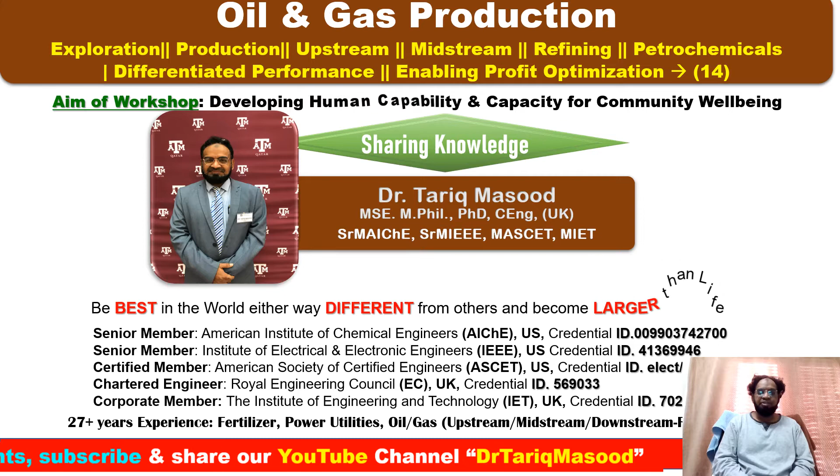Oil and gas production. These are the series of lectures which I'm still discussing. So my plan is to deliver 300 lectures probably, so over the next couple of years.

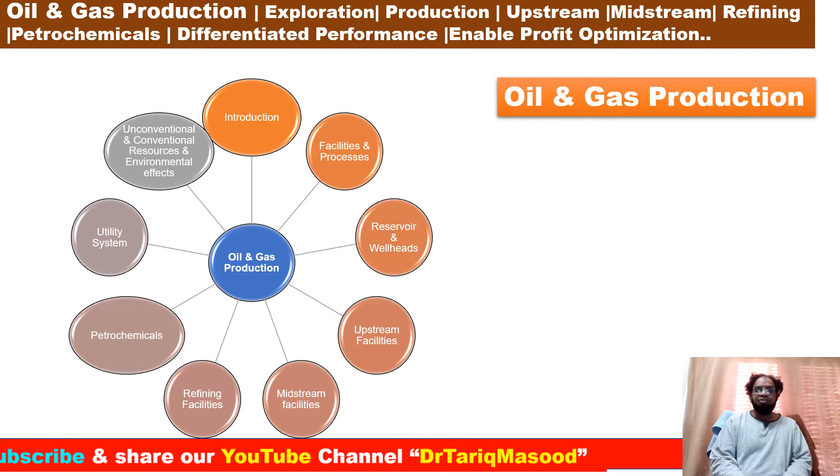Introductions, facilities and process, reservoir and wellhead, upstream facilities, midstream facilities, refining facilities, petrochemicals, utility, unconventional and conventional resources, and environment effects. Shaping the clean and sustainable global energy delivery. Plan to deliver more than 300 lectures next couple of years, probably.

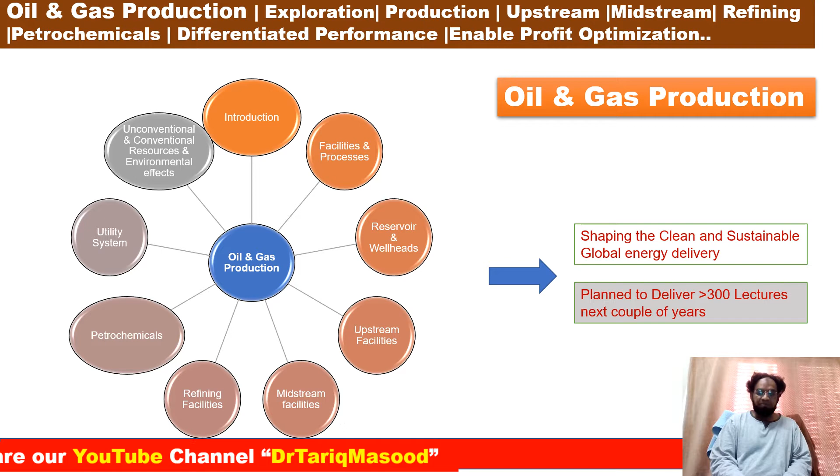Oil and gas production, upstream oil and gas process. So lecture number 15. From my next slide, I'm going to give key takeaway points from lecture number 15.

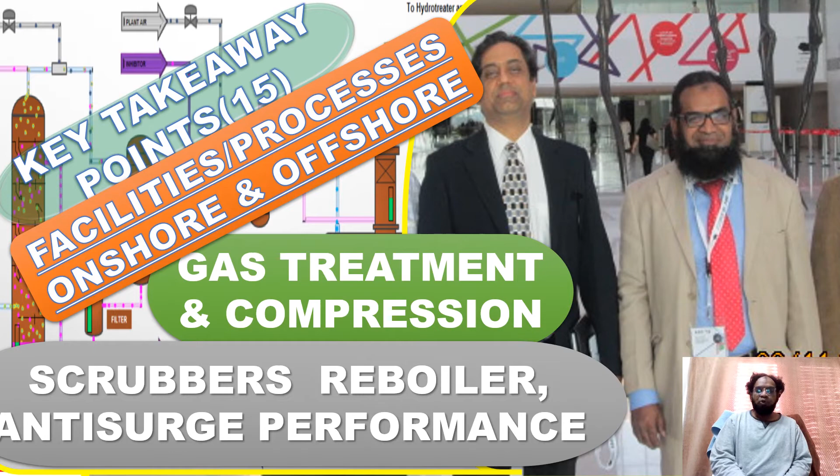Key takeaway points, lecture number 15: facilities process onshore offshore, gas treatment compressions, scrubbers, reboilers, and anti-surge performance.

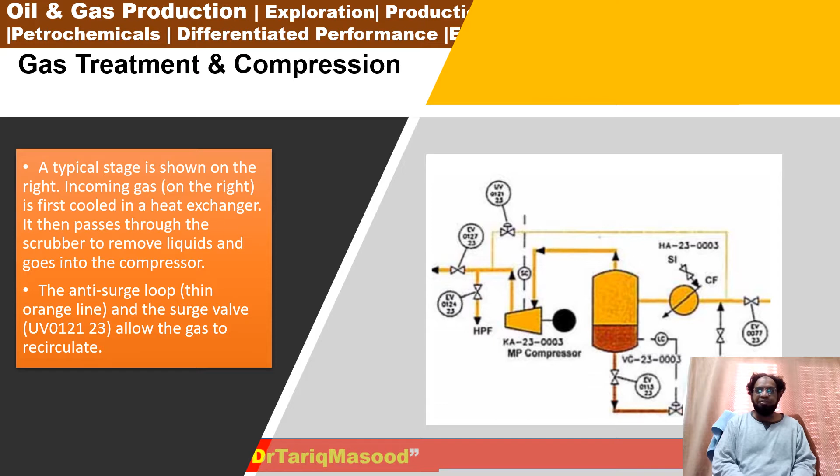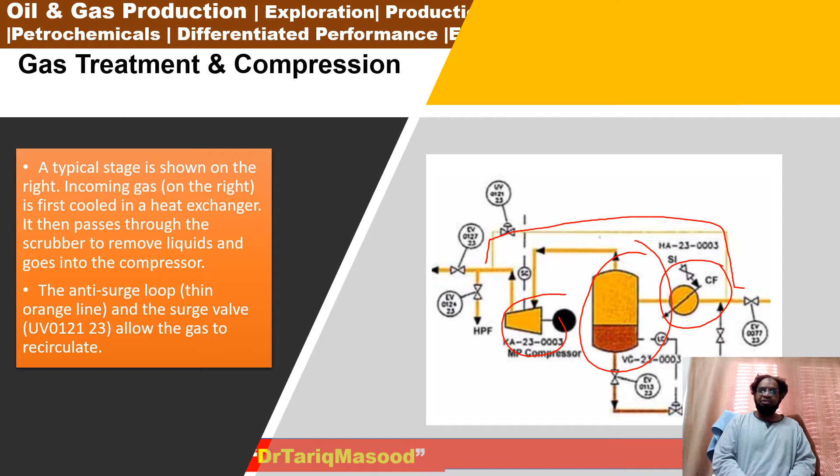Gas treatment and compressions. Before I explain, I'll show you the components here. This is my gas inlet cooler, this is the suction scrubber, and this is the compressor. And this line is the anti-surge line which recycles the flow. A typical stage is shown on the right hand side, if you can see here.

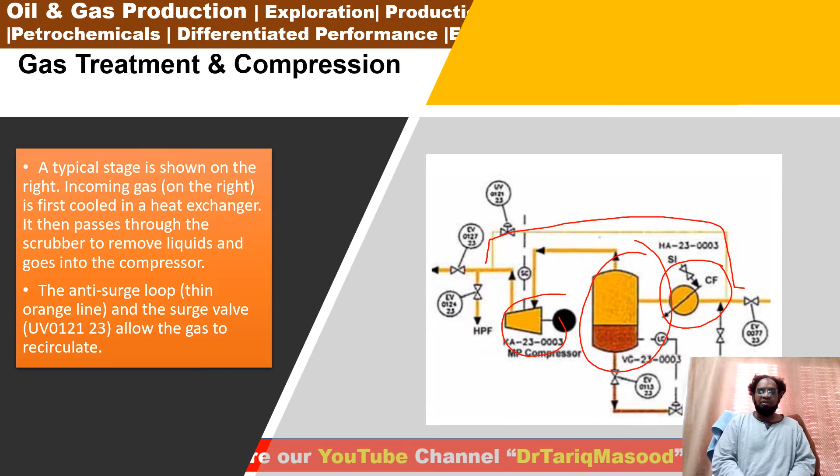So the incoming gas is first cooled in a heat exchanger. It then passes through the scrubbers to remove liquid, and the gas goes into the compressors. The anti-surge loop, the orange line you've seen here, demonstrates the anti-surge valves UV0121 23, which allow the gas to recirculate. The further components I'm going to explain from my next slide.

Heat exchangers, first we are going to discuss. For the compressor to operate efficiently, the gas temperature should be low. If you remember in my earlier slide, we discussed the feed coming from the reservoir at a temperature of around 80 to 100 degrees Celsius, then you need to have the cooler to cool it down for the compression purposes. Otherwise, your compressor will not perform as proposed. The lower the temperature, the less energy will be used to compress the gas for the given final pressures and temperatures.

However, both gas from the separator and compressed gas are at relatively high temperatures. When gas is compressed, it must remain in thermodynamic balance, which means that the gas pressure times the volume over the temperature must remain constant: PV equals nKT. This ends up as a temperature increase.

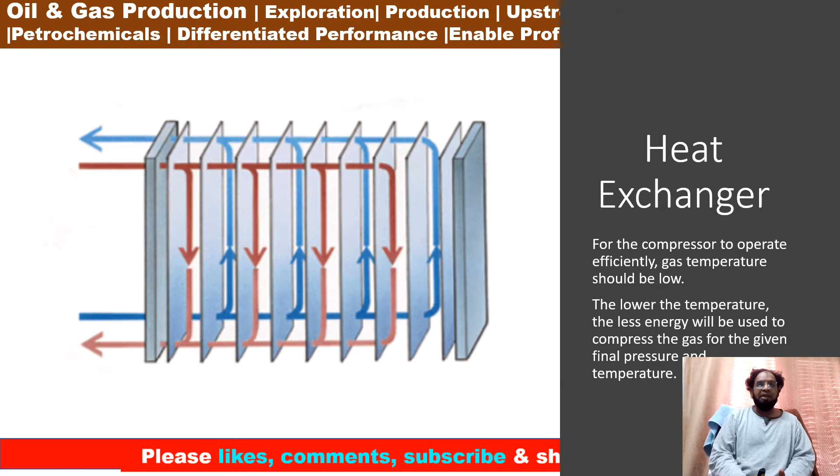Furthermore, as we discussed earlier, heat exchangers of various forms are used to cool the gas. Plate heat exchangers, as shown in my earlier slide, consist of a number of plates where the gas and cooling media pass between alternating plates in opposite directions. The tube and shell exchanger, if you can see here, has tubes placed inside the shell filled with cooling fluid. The cooling fluid is often pure water with a corrosion inhibitor.

When designing the process, it is important to plan the thermal energy balance. Heat should be conserved, for example, by using the cooling fluid from the gas train to reheat oil in the oil train. Excess heat is dispersed, for example, by seawater cooling. However, hot seawater is extremely corrosive, so material with high resistance to corrosion, such as titanium, must be used.

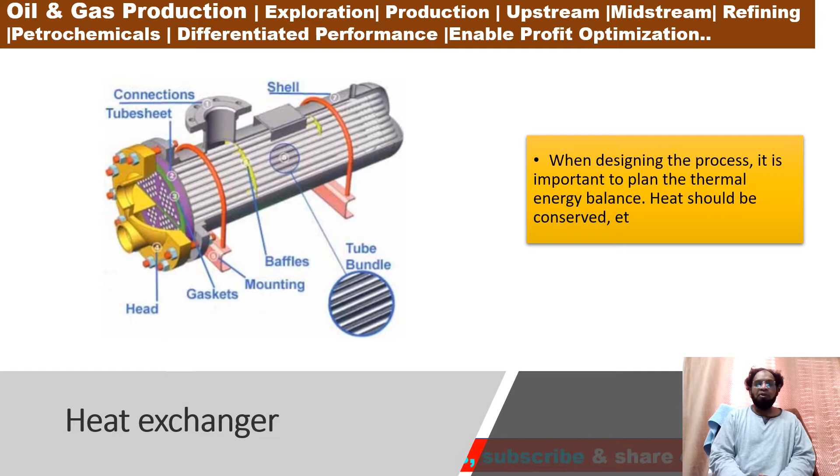From my next slide, we are going to discuss a scrubber. The separated gas may contain mist and other liquid droplets, drops of water, and hydrocarbons also form when the gas is cooled in the heat exchangers, and these must be removed before it reaches the compressor. If liquid droplets enter the compressor, they may erode the fast rotating blades. A scrubber is designed to remove small fractions of liquid from the gas.

There are various types of gas drying equipment available, but the most common we use is a scrubber based on dehydration by absorption in triethylene glycol. The scrubber consists of many levels of glycol layers.

A large number of gas traps force gas to bubble up through each glycol layer as it flows from the bottom to top of each section. Processed glycol is pumped in at the top from the holding tank. It flows from level to level and contacts the gas flow as it spills over the edge of the trap.

During this process, it absorbs liquid from the gas and comes out as rich glycol at the bottom. The holding tank also functions as a heat exchanger for liquid to and from the reboiler.

The glycol is recycled by removing the absorbed liquid. This is done in the reboiler, which is filled with rich glycol and heated to boil out the liquid at temperatures of 130 to 180 degrees Celsius for a number of hours.

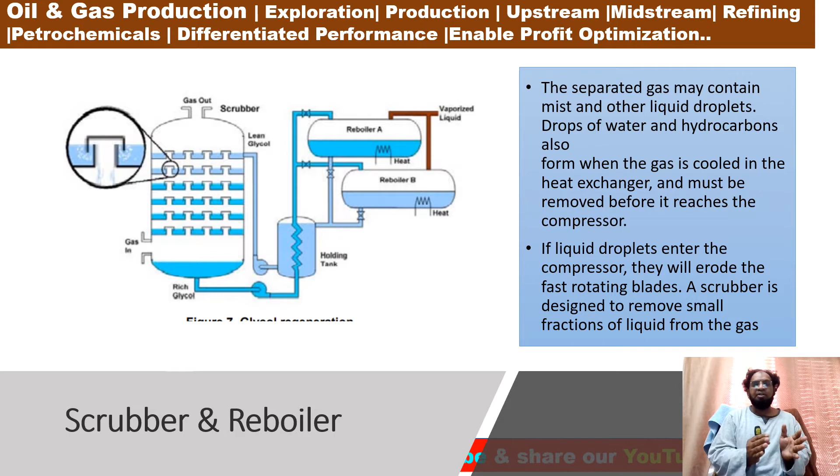This is how, depending on how the process is designed, it varies from place to place or at different facilities. Compressors are used in many parts of the oil and gas process, from upstream production to gas plants, pipeline, LNG, and petrochemical plants.

Several types of compressors are used for gas compression, each with different characteristics such as operating power, speed, pressure, and volume. Today we're going to discuss reciprocating compressors, axial blade compressors, screw compressors, and centrifugal compressors.

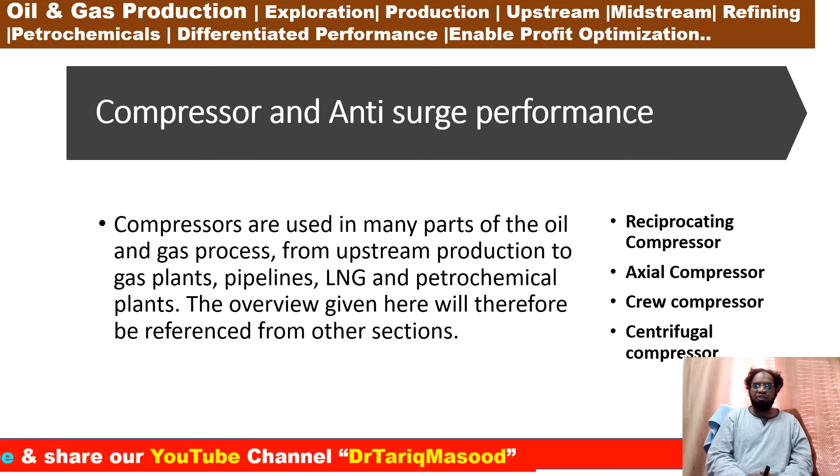Reciprocating compressors use a piston and cylinder design with 2 by 2 cylinders, are built up to about 30 megawatt power, around 500 to 1,800 rpm, lower for higher power, with a pressure up to 50 megapascals or 500 bar. Used for lower capacity gas compression and high reservoir pressure gas injection.

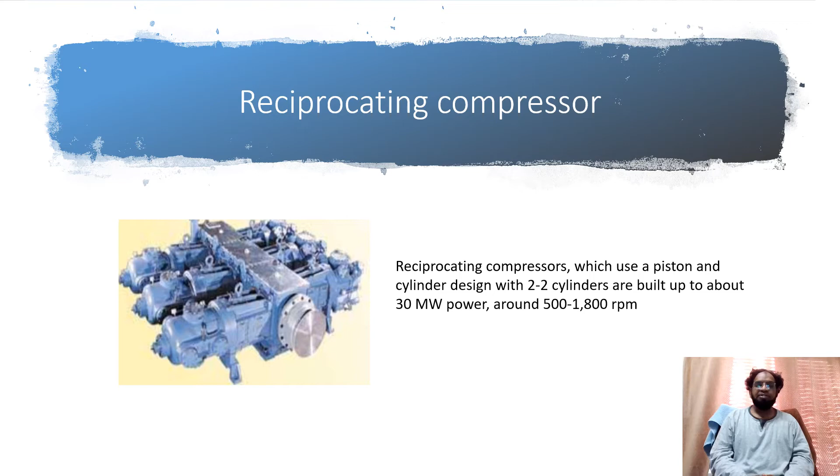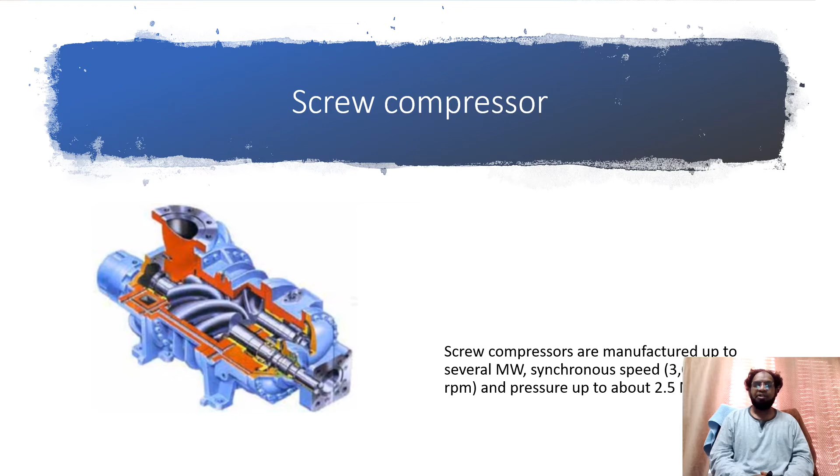From next we discuss the screw type compressor. Screw type compressors are manufactured up to several megawatts. Synchronous speed is 3000 to 3600 rpm and pressure up to about 2.5 megapascal or 25 bar G. Two counter-rotating screws with matching profiles provide positive displacement and a wide operating range. Typical use is natural gas gathering or vapor tank blowers, etc.

Axial blade compressors. Axial blade and fin type compressors with up to 15 wheels provide high volume at relatively low pressure differential, discharge pressure 3 to 5 times inlet pressure, speed up to 5,000 to 8,000 rpm, and inlet flows up to 200,000 cubic meters per hour. These are used as air compressors and cooling compressors in LNG plants and large oil and gas installations, etc.

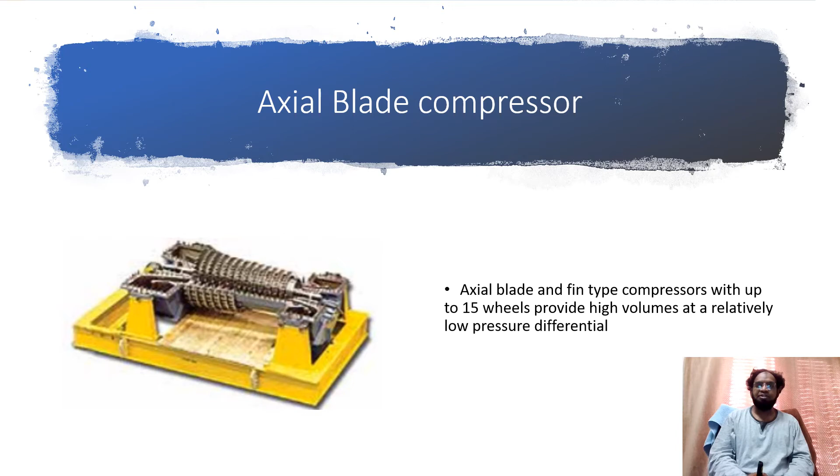From the next slide we discuss centrifugal compressors. Centrifugal compressors with 3 to 10 radial wheels, 6,000 to 20,000 rpm, highest for small size, up to 80 megawatt load, at discharge pressure of up to 50 bar and inlet volumes of up to 500,000 cubic meters per hour, pressure differential up to 10 bar.

Most compressors will not cover the full pressure range efficiently. The lowest pressure is atmospheric for gas to pipeline. Some 3 to 5 megapascal, 30 to 50 bar pressures are used, while reservoir injection of gas will typically require 20 megapascal or 200 bar and upwards.

Since there is no liquid in the tubing and the full reservoir pressure must be overcome, the compression is divided into several stages to improve maintenance and availability. Also, due to single unit power limitations, compression is often divided into several parallel trains. This is not the case in this example since gases are not exported and re-injection can be interrupted during maintenance periods.

Compressors are driven by gas turbines or electrical motors for lower power, and also reciprocating engines and steam turbines are sometimes used if thermal is not available. Often several stages in the same train are driven by the same motor or turbine.

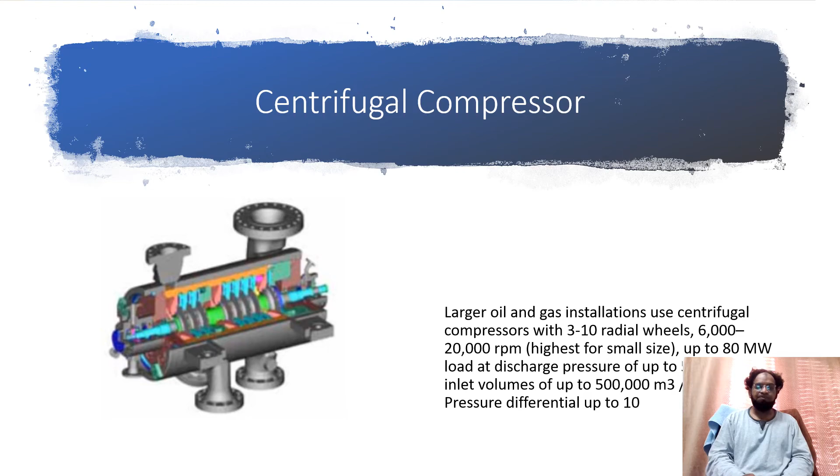Okay, from the next slide we will discuss a surge system. Now we're going to discuss surge performance.

The objective of compressor performance control is to keep the operating point close to the optimal set point without violating the constraints, by means of control output such as the speed setting. However, gas turbine speed control response is relatively slow, and even electric motors are not fast enough. Since the surge response must be in the 100 millisecond range, anti-surge control will protect the compressor from going into surge by operating the surge control valves.

The basic strategy is to use the distance between the operating point and surge line to control the valves, with a slow response time starting at the surge control line. Crossing the surge trip line will cause a fast response, opening the surge valve to protect the compressor.

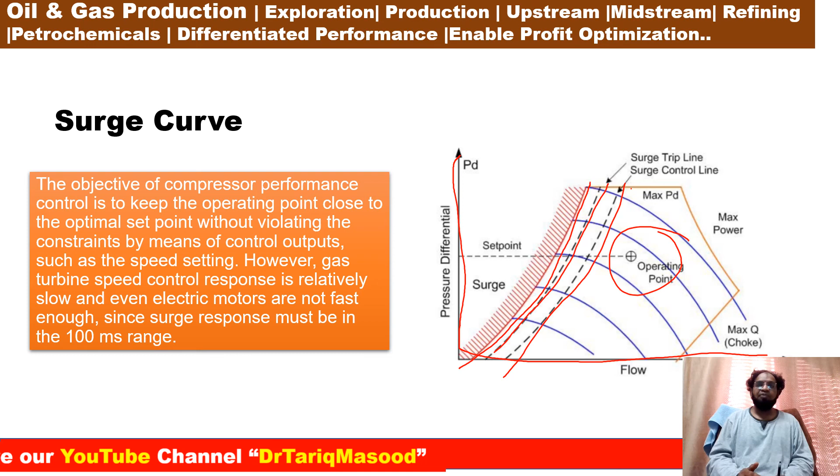Number three, speed governing. If the compressor is turbine driven, dedicated speed governors handle the fuel valves and other controls on the turbine to maintain efficiency and control rotation speed. For electrical motors, this function is handled by variable speed drive motors.

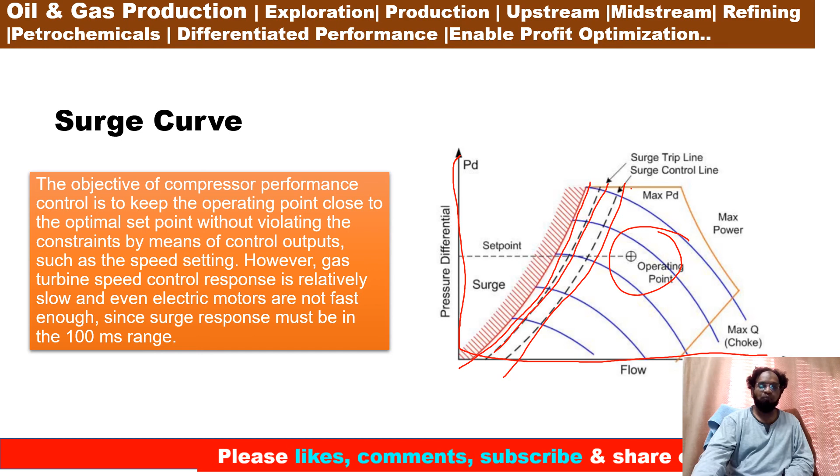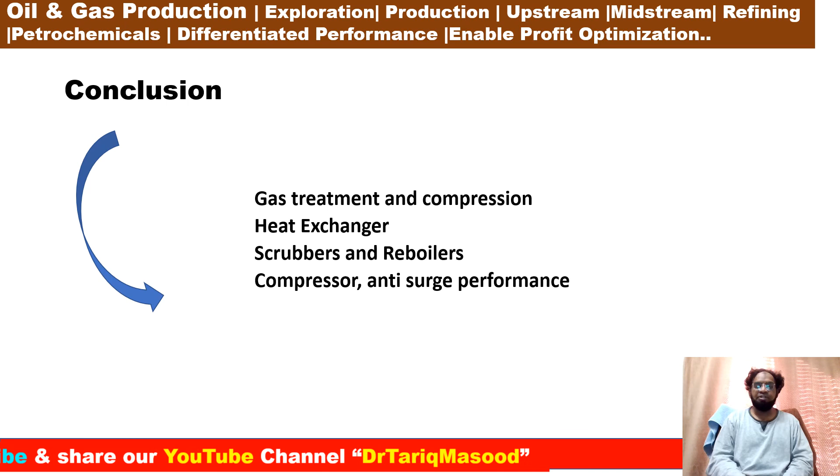Conclusion: today we have discussed gas treatment, compressions, heat exchangers, scrubbers and reboilers, compressor and anti-surge system.

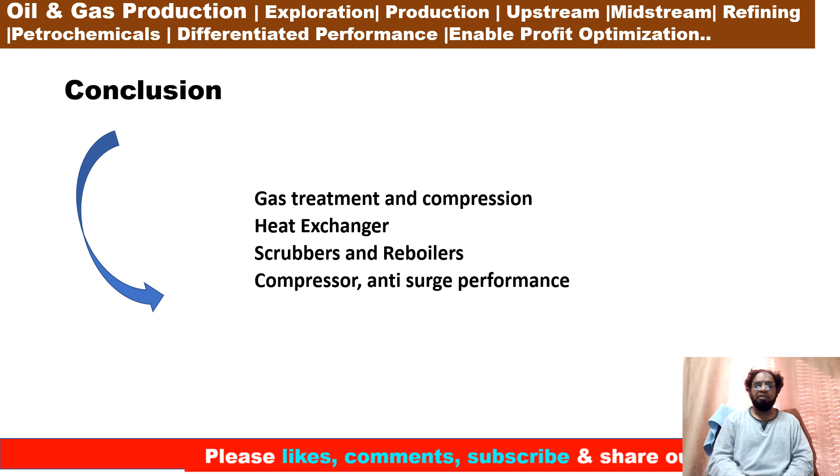Our next plan is to discuss oil and gas storage, metering and export.

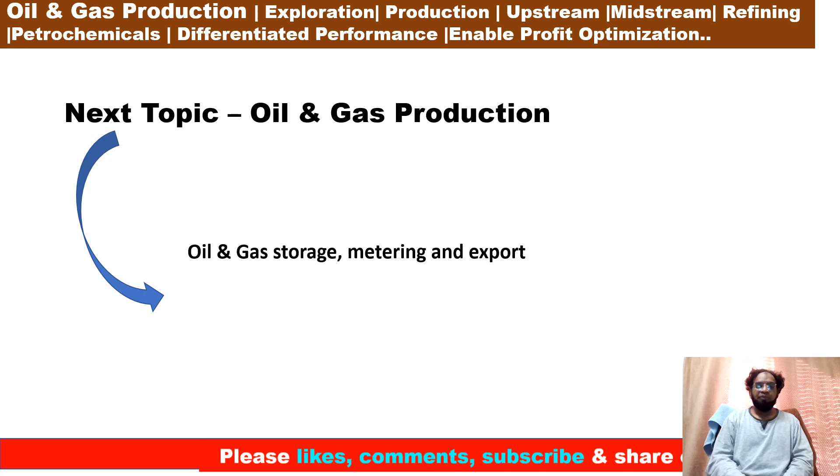These are a few references: Qatar Petroleum, Doha; Oil and Gas Development Company Limited, Pakistan; World Energy Outlook; US Department of Energy; Schlumberger; International Energy Agency; Wikipedia; Oklahoma State Oil; NORSOK; The Story of Oil in Pennsylvania; Air Liquide gas encyclopedia; and Natural Gas from the Wellhead to Burner Tip.